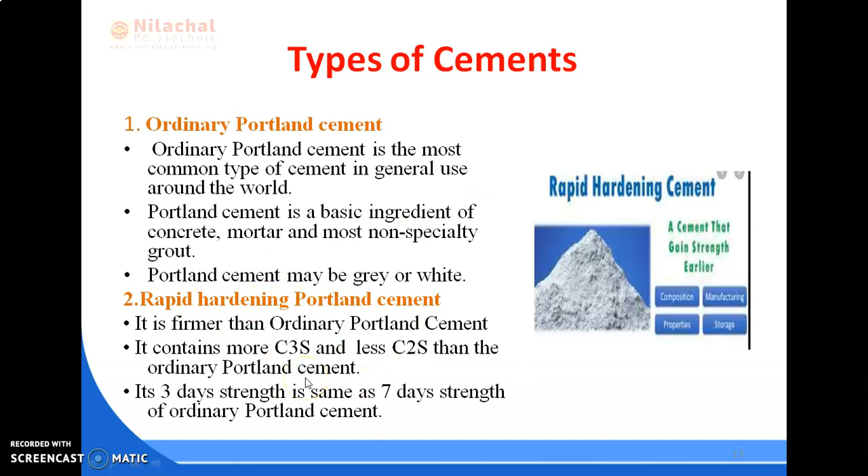Next is low heat Portland cement. The heat generated in OPC at the end of 3 days is 80 calories per gram, while in low heat cement it is about 50 calories per gram of cement. It has a low percentage of C3A, tricalcium aluminate, and relatively more dicalcium silicate and less tricalcium silicate than OPC. And it reduces and delays the heat of hydration also.

Next is sulfate resisting Portland cement. Its maximum tricalcium aluminate content is 3.5% and minimum fineness is 2500 centimeter square per gram; it is finer than OPC. Sulfate forms sulfate aluminates, which have expansive properties and so cause disintegration of concrete.

The clinker of cement is ground with about 60 to 65% of slag to form this type of cement. Its strength in early days is less, and hence this type of cement requires a longer curing period, and it proves to be economical as slag, which is a waste product, is used in its manufacture.

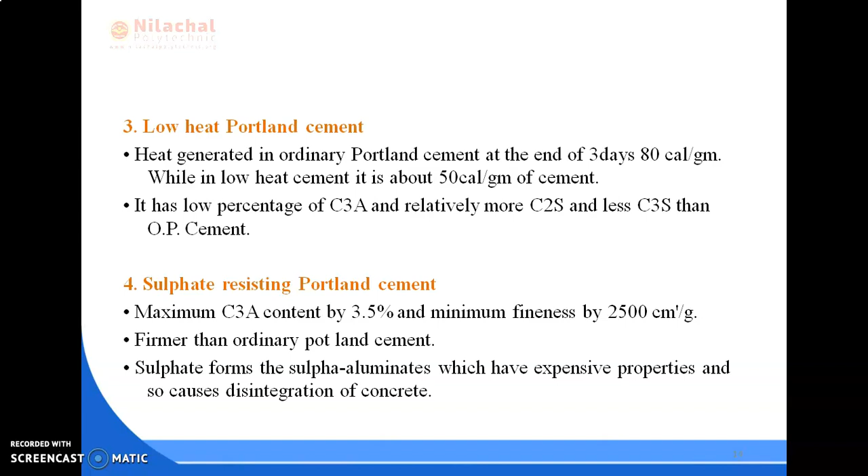Next is white Portland cement. The grey color of OPC is due to presence of iron oxide. White cement is basically used for swimming pools, painting garden furniture, molding sculptures and statues, etc. It is quick drying in nature, possesses high strength and has superior aesthetic values, and it also costs more than OPC because of specific requirements imposed upon the raw materials and the manufacturing process.

Next is colored Portland cement. Cement of the desired color may be obtained by mixing mineral pigments with ordinary cement, and the amount of coloring material may vary from 5 to 10%. If this percentage exceeds 10%, the strength of the cement is affected. Iron oxide in different proportions gives brown, red or yellow color. Colored cements are widely used for finishing of floors, window sill slabs, stair treads, etc.

So these are some types; there are also more types of cements available, like expansive cement, high alumina cement, and pozzolanic cement.

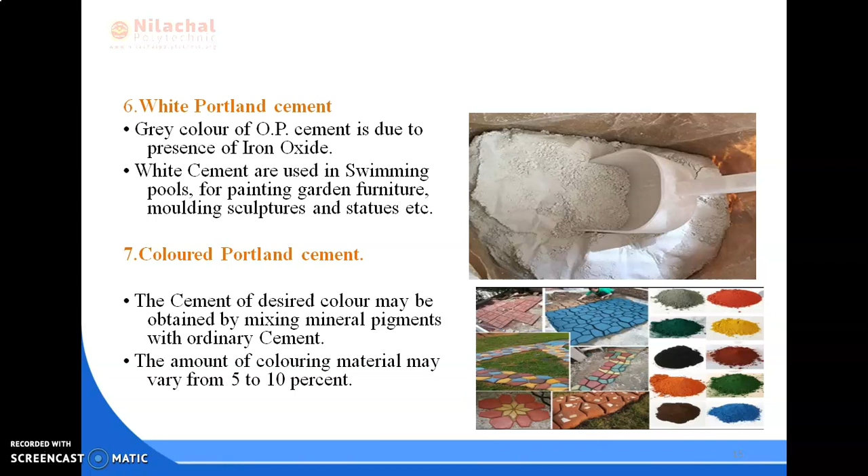Next is water cement ratio. It is defined as the ratio of cement and water utilized in the preparation of concrete by their weight, and the quantity of water used in mixing concrete is very important. If the percentage of water used is less, then there will not be a sufficient quantity of water to hydrate cement. Also, if we add more water, then obviously we can see bleeding or segregation of fresh concrete.

So we must take care of it during the mix design process. We have to find out a particular water cement ratio to form fresh concrete. Also, the addition of more water gives a dilute paste, which has more pores at the micro level. This makes the concrete weak and results in shrinkage, cracks and different issues. As I already said, too much water also results in segregation or bleeding of aggregates and gives porous concrete of low strength and low density.

So, this graph shows water cement ratio on the x axis and compressive strength on the y axis. What we see here is that in the initial stage, when the water cement ratio is low, compressive strength is high, and as the water cement ratio increases, compressive strength decreases. So, it is inversely proportional, but that does not mean we can use a minimum quantity of water to get more strength of concrete. It is not possible.

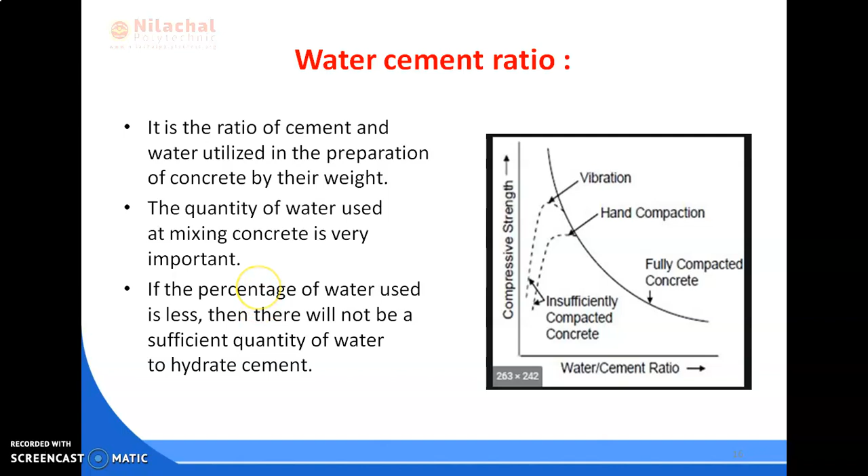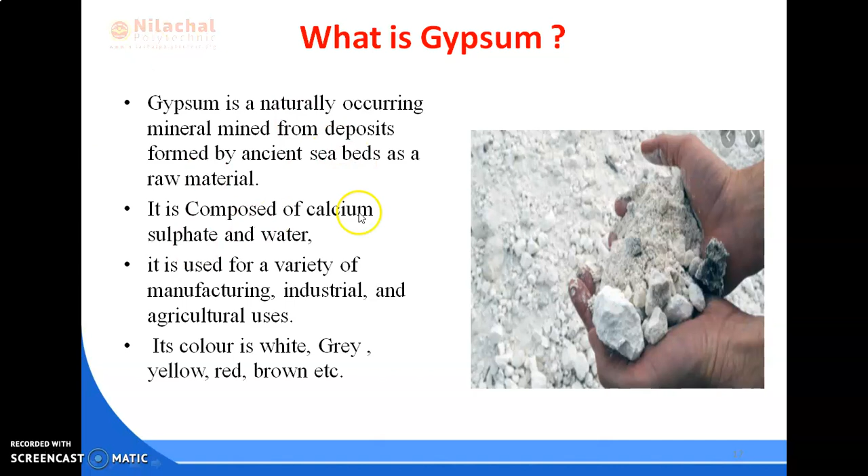Next, one more important thing: what is gypsum? Gypsum is a naturally occurring mineral mined from deposits formed by ancient seabeds as a raw material. It is composed of calcium sulfate and water, and it is used for a variety of manufacturing, industrial and agricultural uses. Generally its color is white, grey, yellow, red, brown, etc. An important property of gypsum is that it is naturally fire resistant. So, it is also a 2-mark question and important.

The next question is also important: why is gypsum added to cement? Gypsum is a mineral and is hydrated calcium sulfate in chemical form, as I have already told. The main purpose of adding gypsum to cement is to slow down the hydration process of cement once it is mixed with water. That means it is basically used as a retarder, and it plays an important role in controlling the rate of hydration of cement. So, it is generally termed the retarding agent of cement.

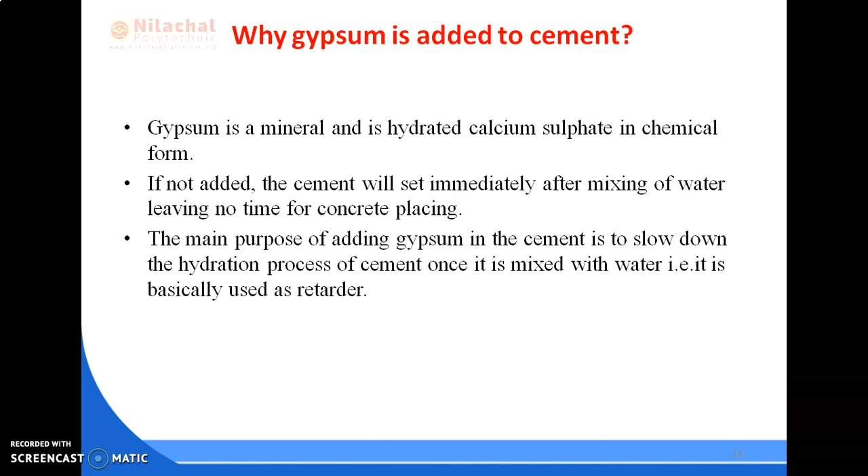So, it is mainly used for regulating the setting time of cement and is a main component to regulate or slow down the initial setting time of cement. This is an important 2-mark question, why gypsum is added to cement.

Next is grade of cement. Grade of cement is nothing but the strength of cement. We all know that cement is the primary ingredient of concrete, which means the strength of cement is directly proportional to the strength of concrete. The grade is the metric to measure the strength of cement, and the strength of cement increases as the grade of cement increases. Also, fineness of cement increases with the increase of grade.

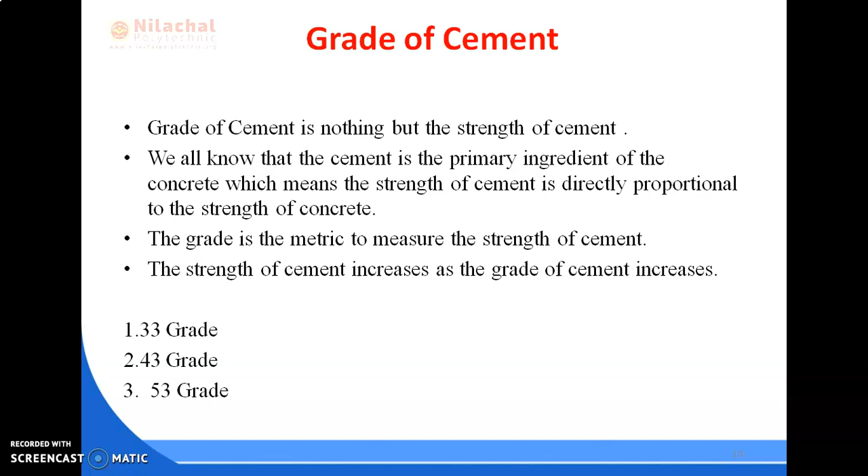So, let us see what is 33 grade. The cement which has a compressive strength of 33 Newton per mm square after 28 days when tested is known as 33 grade cement. The initial strength of 33 grade cement continues to gain even after 28 days. The heat of hydration of this grade is lower compared with 43 grade and 53 grade, and it is widely used in plastering work, brick work of walls, tiling work, etc. Next is 43 grade.

The cement which has a compressive strength of 43 Newton per mm square after 28 days when tested is known as 43 grade cement. It has low chloride content, so it does not cause corrosion of steel reinforcement, and it gives good workability of concrete. The initial strength of this grade continues to gain even after 28 days.

Also, it gives a better surface finish to the structure, and it is used for the preparation of ready mix concrete, PCC and RCC work, RCC bridges, and for finishing all types of structures like buildings, bridges, roads, water retaining structures, etc. It is also used in precast and pre-stressed concrete.